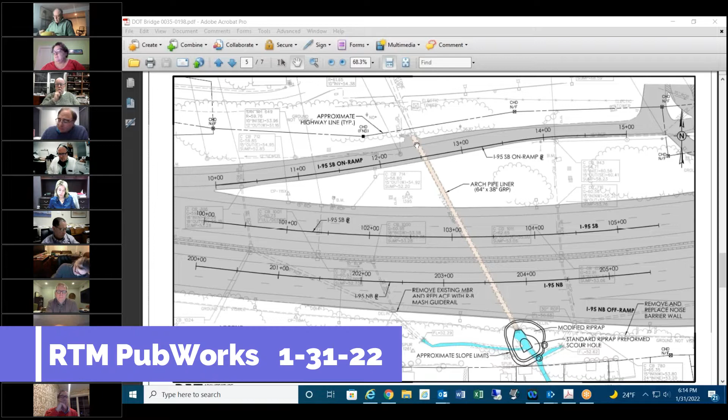Sure. Actually, Ed did that calculation in our conversations earlier today. So it's a little bit jumping ahead out of order of your questions here, but I believe the cross-sectional area of the existing culvert is 18 square feet. When they finish, it's going to be 14. And the stone culvert, Ed, was 12? 10.5. Okay. So the stone culvert is in fact the smallest, and it's also the roughest. So that friction matters in how much flow you can get through a pipe. And it remains the limiting factor in the design of this whole thing and how the water gets underneath both of these two transportation facilities.

So I'll jump back in order. Given the water sources feeding into this pipe, what effect will narrowing the pipe have on water flow into the pipe and water flow and velocity leaving the pipe? According to the engineer's calculations, we just mentioned the proposed cross-sectional area is going to be smaller. And they have calculated that something called the Manning's n, it's a roughness coefficient, is much smoother. So the smoothness, as I said, friction matters. It's going to be less frictional resistance. So even though the pipe is a smaller cross-sectional area, it's still going to pass the same amount of water.

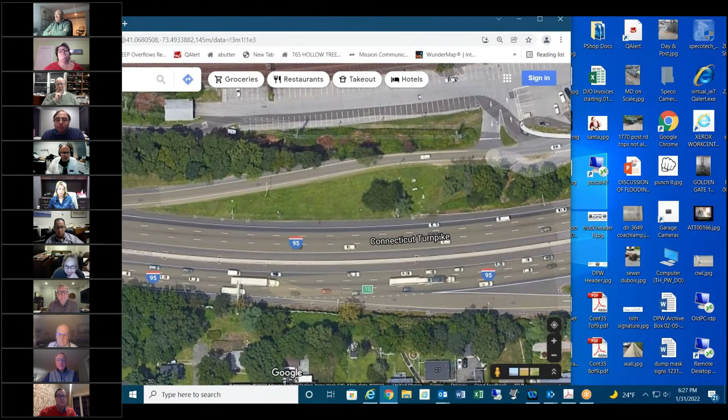I'm going to try and move some stuff around. Good heavens. Okay. Can you see that? Yes. You should be able to see that, right? Okay.

So from the previous map, these two catch basins here, our catch basin is actually over in this area. It's up the hill just a little bit. And here's the stream. So this culvert, if you could follow my mouse, does something like that. The culvert crosses on a diagonal, okay? And if I scroll down here, here's Maple Street, and you can see how narrow those streams are. And it goes down through Relihan, through private property.

We were going to take easements in order to improve those streams because we would have to mitigate that. That would cause flooding there, make it bigger. And then into the back of Baker Woods. If I zoom out, the retention pond: to mitigate the flooding, first we were going to increase all of the capacity to get to this place. And then there was going to be a very large pond, sort of in a kidney shape here.

And this is the Dulcetti 55 Noroton property where this water all exits and goes down Archer towards the town hall. So, let's see if I could drop the guy.

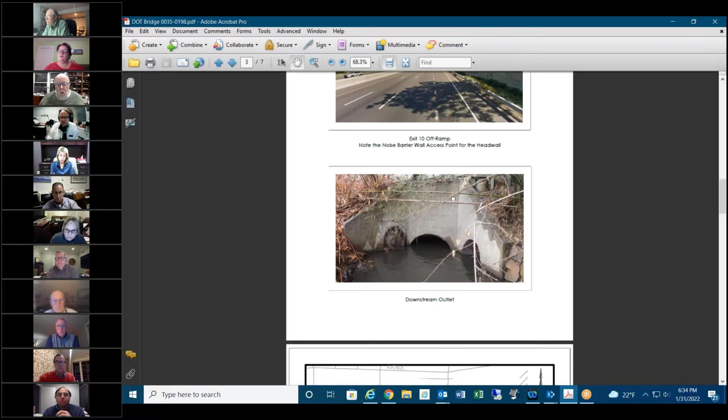And there's the area. And right here is the plunge pool. They call it a plunge pool. So this area is going to be enlarged, and it's going to be lined with stone. So that area gets bigger, so the velocity comes through faster when it leaves the pipe. However, it hits this big surface area, this big volume of water standing there.

And if the flow is the same, and it should be about the same because the stone culvert will meter it out the same, all these contributing factors here are the same. Other catch basins on I-95. The amount of water leaving this plunge pool, which we just looked at on the street view on Google Map, is also going to be the same. However, the velocity coming through here is faster. It hits this and it gets buffered and leaves at the same flow rate.

Now there's no changes in the stream proposed. So with no changes in the stream proposed, that stream will have the same capacity that it has now. It'll pass the same amount of flow that it is now. In other words, there shouldn't be very much of a change if it's even measurable. And this plunge pool will be the thing that slows it down. The only place the velocity is really going to be faster is in the pipe, and the discharge point of the pipe is obviously what we would be concerned with. And that plunge pool is going to absorb the shock. It's going to dampen it.

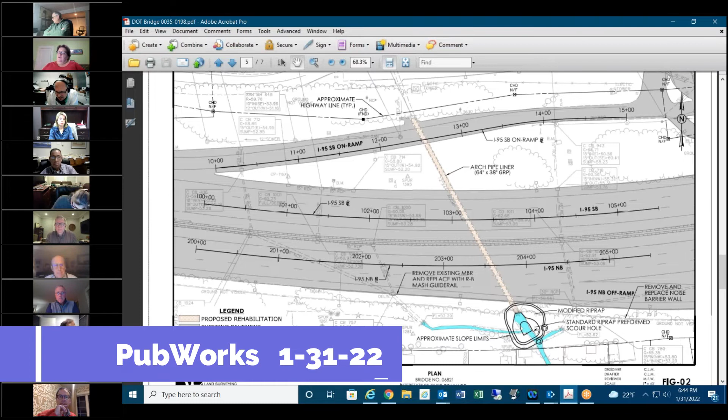I can't tell from looking at the survey what the existing elevations are at this scale. The reason they're making it bigger, here they are looking down.

Yeah, Darren, you're breaking up. Sorry about that. Can you hear me now? Yes. Okay. The reason that they're making this plunge pool wider is probably... I apologize. He is breaking up. I can hear him through the wall. I know he's talking, but he's doing his best.

Let me see if I can answer that for you. These plunge pools are designed so that, as we come out of the pipe, the water drops down a certain distance, whether it be a foot or two, to collect not only energy from the water, but also silt that could be caught in it. Instead of going downstream, it's like a forebay to clean out at the same time. What they also do is, on the outside, directly in front of the pipe, collect the energy as it hits the ramping up of this plunge pool, if you will.

So directing the water back to the channel of the stream. I guess that's a good way to put it. I told Darren the best way to describe this is you're on a slide and you're going into a pool, and all of a sudden you hit that water and you stop and you slow down. This is the same thing that's going to happen with the water coming out of this pipe. Dissipate the energy, slow it down so it can be directed and managed through the remaining channel out to Maple Street.

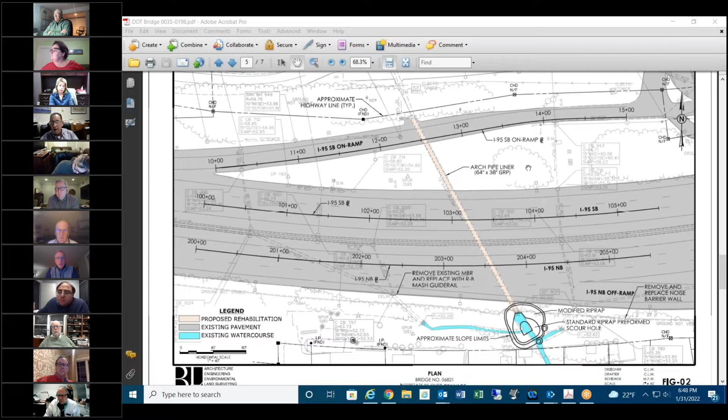Yes, Ed, if somebody wants to see an example of this plunge pool, are there any opportunities nearby? You're muted, Ed. We could probably Google it and get you a good shot of different types of plunge pools, and we could get those out to Rolf if he wants to send them out. But I'm trying to think if there's anything local around here. Nothing off the top of my head where I could say, go here to take a look at that.

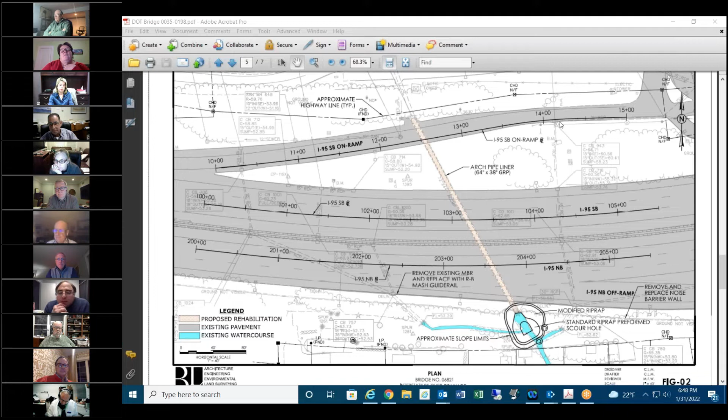And this is going to be a large plunge pool. If you look at it, it's almost as wide as one of the residential lots right there on Maple Street. Yeah, see. And again, when you look at it overhead on Google Maps, it doesn't look like there's that much room there. So I'm not doubting the plan here. I'm just having trouble reconciling the two. Okay.

All right. I think Rolf, you had two more questions at the end here. Yeah, go ahead, but I think we probably already answered them. No, I don't think you got to this one. This is a good one though. Is the project subject to WestCOG review and approval? It isn't, to my knowledge, but that doesn't mean we couldn't ask them for assistance if we needed it, whether advisory or technical. Darren and I put our heads together a little bit too. If we possibly need a third party to review this, that's always an option we could do if we had to.

So, you know, we have some options to make sure that the design is being done properly, the area is being analyzed properly. So, but to answer your question specifically, WestCOG, I don't believe, has any authority over the DOT. Okay, so they might not have authority, but they could be employed to weigh in with some sort of opinion or observations about the project.

I think they always like to be involved if the towns need them. Well, that's why I raised the question. I mean, WestCOG always likes to be involved, so why not this? Well, you know, their expertise sometimes may not lie in where you need them, and I don't know if on staff they have people that do this, but obviously they could direct us to a consultant that we could use, or we have a couple of consultants that we use on a regular basis to do third-party analysis to analyze certain things. So we're more than capable of either doing it in-house here with a consultant or asking for help with WestCOG.

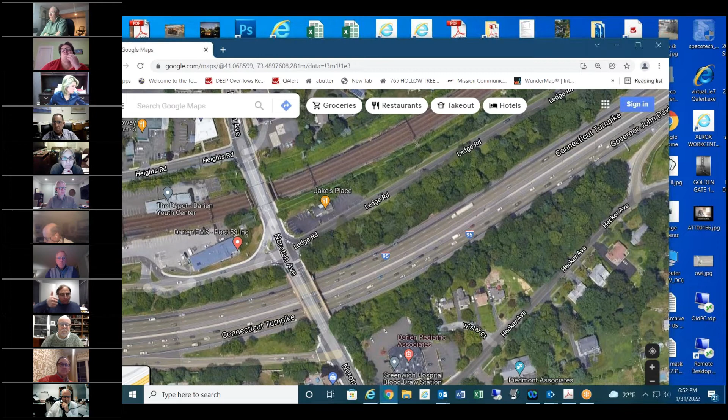My pleasure. I plan on being in that meeting, if nothing else, as a resident citizen of Darien and my concerns in that regard. I'll follow up with the committee to see if they want to take a stance and make any sort of statement that they would submit as the Town of Darien Public Works Committee for the RTM, and submit that. And of course, I would encourage all members to participate in the meeting on February 10th.

Very good. I think that will go over very well. I think they're looking for, I'm going to say, constructive criticism. I think they're looking for some backstory too. I think Darren's given them plenty, but it doesn't hurt to hear how things have worked or have not worked in the past here. And I think we're going to get that at that meeting. Okay, very good. Anybody else that wants to chime in here? I know Monica's moving on, and I'm sure Ed and Darren are going to move on soon as well. So last call. Last call for the meeting.

I'm new to this whole thing, so a lot of that stuff was over my head, and I've got a feeling that people are more in the majority of not understanding. Ed, I really liked when you said it collects the energy and puts it back into the stream or whatever, and taking it and making it more user friendly. A lot of these terms are extremely difficult for the novice.

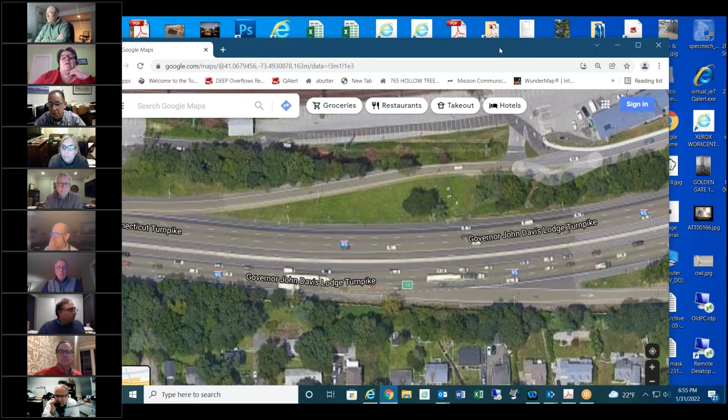This is a method they believe will work for them, this type of pipe intrusion. And I think it behooves us to ask about it. I'm curious about some of the things, how they're going to do it. And when they're done, how do we make sure it's been done right? What's the as-built, right? Tell me you built it correctly.

Right. This is Jackie. If I could ask just one question. Carrie, you emboldened me. I'm also a newbie, so a lot of this is above my pay grade. But is there at all a safety concern about this plunge pool if it's going to be deep and there's water coming into it at a velocity? This is a very populated neighborhood. Is there any sort of safety question?

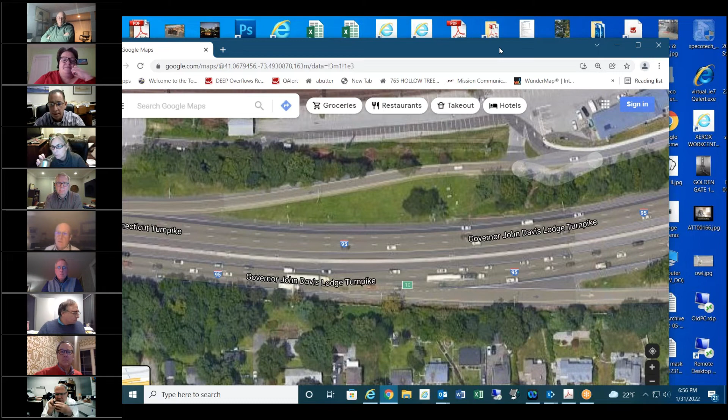Absolutely, absolutely. And I haven't been back to these properties behind there, and I think that it behooves us to ask that question. That is also a good one, but I've seen them where they've built these plunge pools and surrounded them with fencing, whether it be 4 to 6 foot high chain link fencing. Those are things that they do to protect the areas so that they're safer.

Great. And is there a timeline for this, especially so we can see how the construction on Heights Road might impact the waterways to see if that changes the water flow at all? I believe Darren has some type of schedule, and for the life of me, still can't get him to speak on camera anymore. He disappeared on us.

Can you guys hear me now? Oh, yes. Okay. So you're called in. I'm on the phone. Okay. Darren, I don't know what happened to the audio.

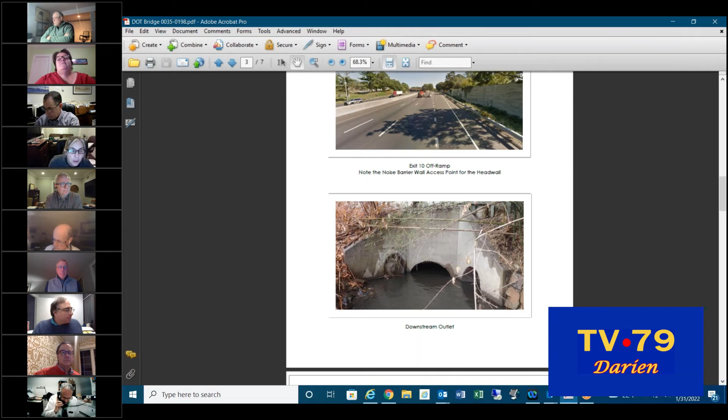Darren, do you have a tentative schedule for this project? Let's see. The notice we got said it would be proceeding in 2025, so there's a fair amount of lead time. Okay. The meeting, obviously, virtual meeting, February 2022. Design deadline is August 2022. And I seem to remember somebody just said 2025 for completion of construction. It sounds about right. Yeah, it's 2025, spring to fall. Estimated construction cost 1.8 million. Okay. Very good, Frank. Spot on.

Can I jump in? Sorry for my audio, I had to step away. Right when I got cut off, there was a question about the culvert precluding expansion of the pipe underneath the railroad track. Was that answered adequately? If not, I could just tell you very quickly, as part of the original proposal for us to jack and bore a new pipe underneath the railroad track,

there were no plans to make the pipe underneath I-95 larger or handle more water. So again, the stone culvert that's there is the limiting factor. If we put a bigger pipe underneath the railroad tracks, the pipe that's underneath I-95 right now is already big enough, and the pipe that they're replacing it with is going to handle just as much water. So no, it would not preclude anything downstream.

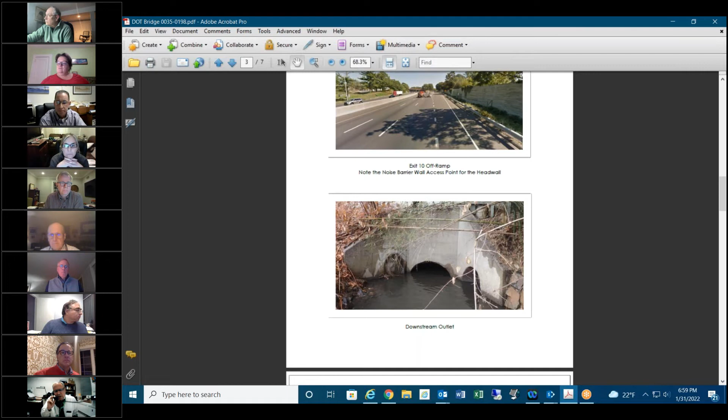This pipe that they're doing, if it's handling the same amount of water, would not preclude eliminating the flooding in the Heights if that project was ever resurrected and we were to put a new pipe underneath the railroad tracks. But again, as somebody mentioned early on, if you do that, you have to mitigate the stream, which we looked at through those people's yards, through Relihan, into the back of Baker Field, to hold on to that water before it goes downstream and causes more problems.

Oh, wait a minute, Darren, I'm a little confused now. I was with you right up until that last point, but now you're saying that if the culvert under the railroad is improved, then even though the pipe under 95 would be able to handle the amount of water, downstream from that would then become a problem?

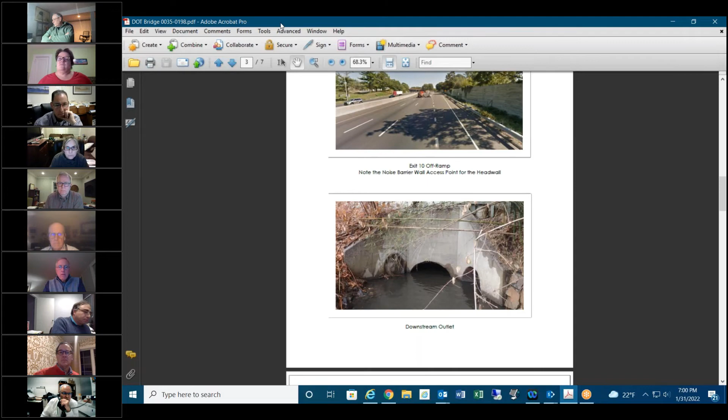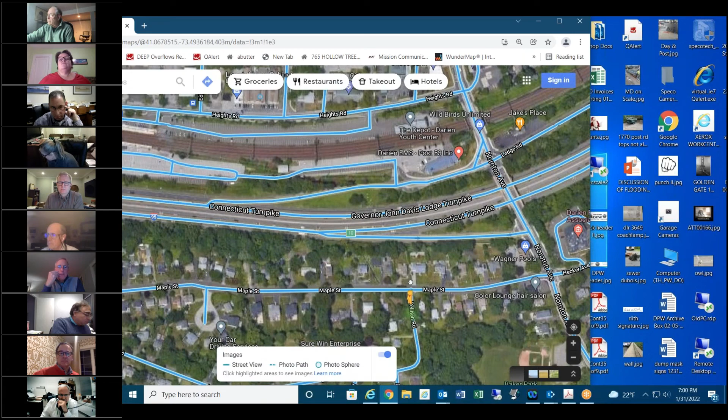Yes, that's correct. Hold on one second. Here we go. Let me drop the little man down again. So it can handle the amount of water now and what's planned because it's not handling enough water, right? Well, I think I agree with you. The railroad's choking it off, right? So yeah, which is causing part of the flooding in the Heights.

Okay, so I defer to Darren in terms of the hydraulics calculation, but the 14-foot culvert at the end of this project will carry roughly double the volume that the 10-foot culvert does. It's not off by a little bit. Those 4 additional feet of diameter give you actually double the volume that could go through there. So it's a lot bigger than the railroad culvert.

Yes, well said. And you guys can still see my screen, right? Yes. So this is the stream we looked at before. We're looking right at where the plunge pool would be in these people's backyard, right? So we're looking north, correct, from Maple Street. So part of the proposal to eliminate the flooding in Heights Road by making a bigger culvert underneath the railroad track was to include improving this stream,

and then if you go down on Relihan and you look here, you could see that there's a stream in here someplace, right? Right. And then it comes out on the other side. Yeah, it comes down and it discharges right here into the headwaters of Baker Field. Yep. There's a big corrugated pipe there. Okay, perfect. So from here all the way up to the I-95 plunge pool was going to be improved. The I-95 culvert that we're discussing here today was never going to be improved. It already has the capacity.

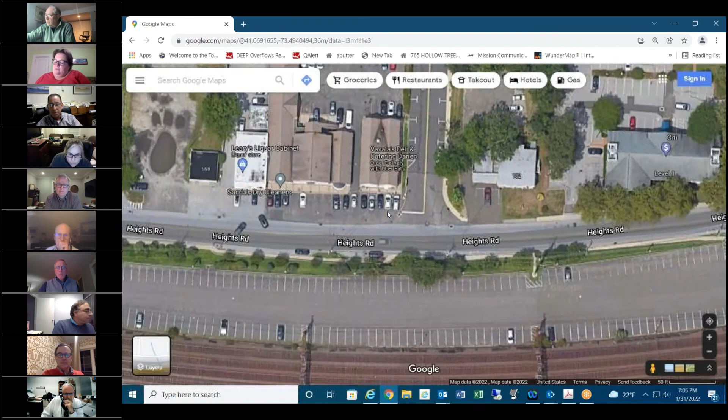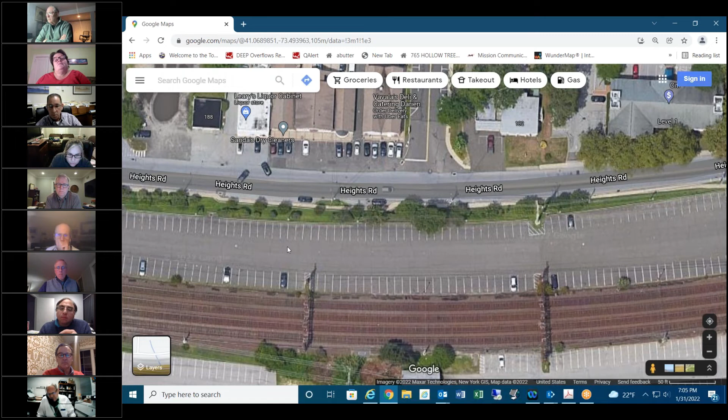And with the larger storms, as it fills up the galleries, what would overflow, I would tie it directly into the stone culvert underneath the parking lot. So basically, I'm trying to eliminate water that goes down into Heights Road, and waiting for the DOT to approve those plans right now. And could we leverage this project and tie that in and try and move that along, do you think?

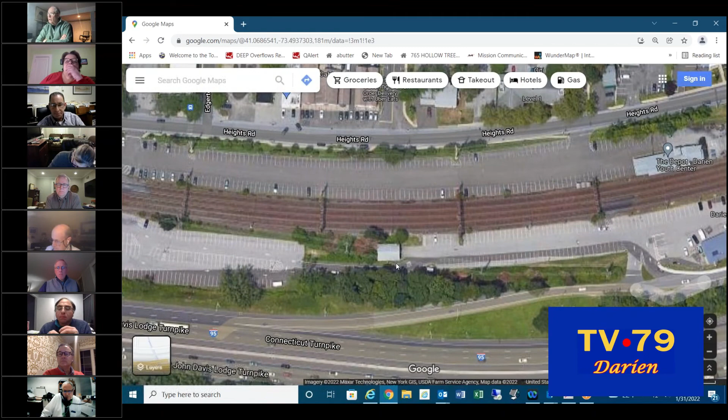Ralph, another good question. Darren has a meeting with them on Wednesday. It actually is to discuss this culvert replacement under I-95, as well as the detention proposal and infiltration proposal in their parking lot to the north. So they want to talk to it as an entire project to see what implications or any impacts that either one of those things could have on this area.

Unfortunately, right now I have mediation with Eversource and PURA at the same time, but I'm trying to get out of it so I can attend this meeting. So if I'm not there, Darren will definitely be there anyway, but I'd like to be there also. I appreciate that. Yeah, I think maybe we can work a package here somehow.

Well, I do want them to approve the plan. They've had it now for over 2 years. And I definitely want to move this along and show that there is no impact downstream on their project down there. And what we're planning to do is basically mitigate the runoff from their parking lot onto our roadway. I think that's pretty much how I sold it to the DOT when I got permission to do the design. Yep. Now, waiting for them to approve it.

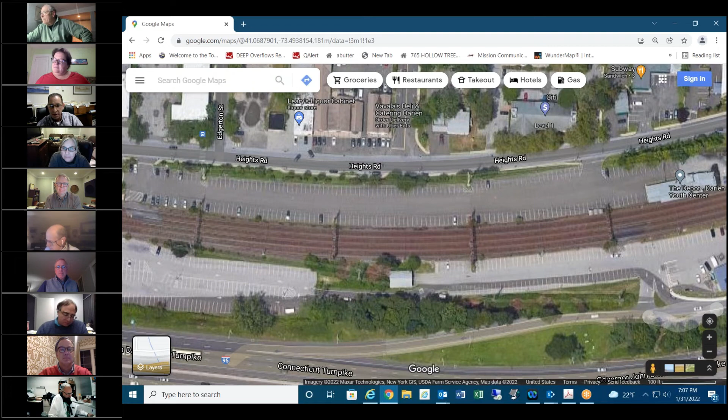Okay. All right. Well, we've covered a lot of territory here. Anybody else? Last call. I said that about, what, 10, 15 minutes ago. Ralph, thank you. Thank you to all the residents, all the members that came into this. It was a good opportunity for me and Darren to explain this and get this out into the public a little bit more, and hope to see you all on the 10th when they have that public meeting.

Very good. All right. If I may speak just quickly to the committee members, does anybody have an opinion about issuing any sort of statement from the RTM Public Works Committee with regards to this project with Department of Transportation? If you want to say something, unmute yourself. I guess no one wants to. I think we've expressed a number of concerns here, right? I mean, I can build off the comments that Patrick's made and the comments I've made. I don't want to be repetitive. But I don't know if we need to make a statement as the committee before we hear them present the plan.

Okay. The flip side is, Ed, once they present this plan, is this a train that can no longer be modified at all? I would ask, we certainly would want to have a chance to have input here on either the strategy or the implementation. So I wouldn't want to miss our opportunity. So if we're running out of time, let us know.

Yeah, well, I think Ed signed off, so I don't think he heard you, Frank. Got it. Sorry. He's still here. Ed's here. Oh, is he? Okay. No, he's muted. I'm still here.

All right. So I guess Frank's question is, is this like a one shot that we get here with this meeting and that's it, or is this the beginning of a saga that could go on into future meetings as well? And I think, if you're asking me, Ralph, I can tell you that it probably depends on the questions at the meeting, right? Which direction they go, or are they answering it to your satisfaction?